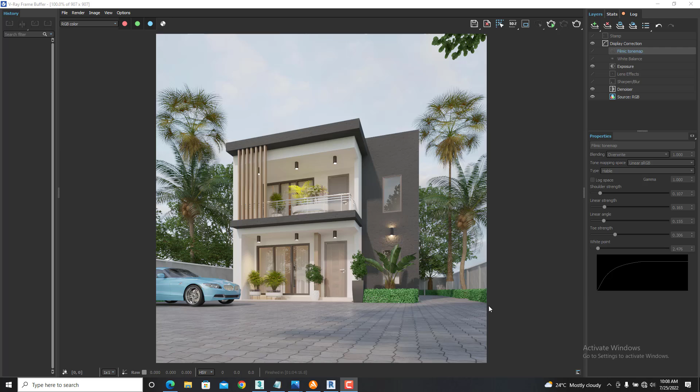After the test render, I can see that I made some mistakes, like this tree is floating, so I've corrected it. I'll bring it down. Let me do that. Press P, so it's inside.

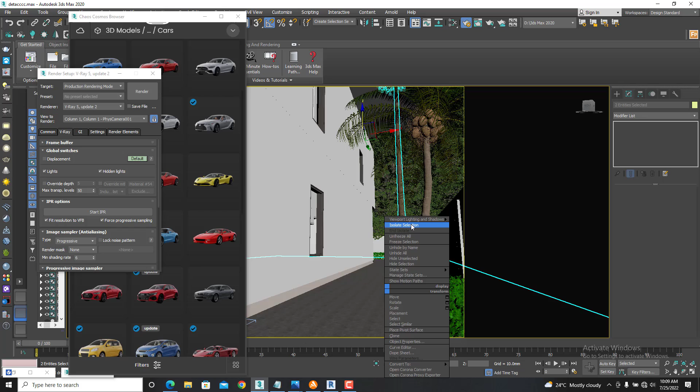Even though all I wanted was just the leaves, as in this part, I wanted this part to show. So I will now end isolate.

So now we want to do the draft render settings. Once we have done the draft render settings, we can now do the final render settings. So we leave this as it is.

We'll come to VRay. Now we are going to use bucket. Then the threshold we use 0.003 to reduce the noise as much as possible. Image filter, let's leave it at this.

Color mapping, you can leave it at this or you can choose exponential. I prefer exponential, but by default what it renders is also okay.

So I think that is all for the VRay. Next one is GI, irradiance map. We'll put it at high or medium, then change the subdivision to like 75. Light cache, change it to 1.18.

Then under this you click on this default. The saturation, I'll put it at 0.23. I'll turn on the ambient occlusion, that's to give it finer edges.

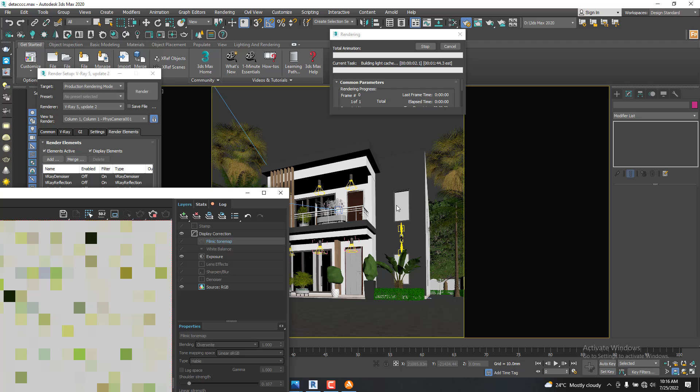So it's going to take some time, but let it load for a while. Then I'll pause it. Then once it has finished rendering, we'll now take it to Photoshop. Yes? Okay, I'm coming.

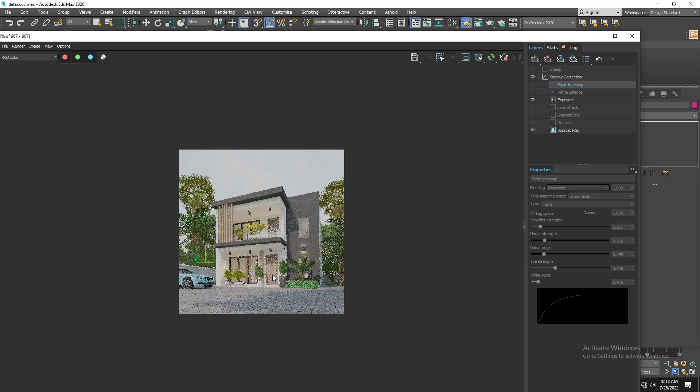So it's rendering, so let me pause it. Once it's complete, we'll continue.

Okay, it has rendered for a while, but I need to explain some more details to you. So this is our render image. Now I told you about render elements, so let me explain it much better for you. Let's go to our render setup.

Now, like I said, render elements—I'm taking this over again so that you will understand it much better. Render elements are just elements that you use to enhance your image. So you have it here.

The ones I usually use are VRay denoiser, VRay reflection, refraction, shadows, and extra tex, specular. Now this specular, I don't need it for now, so let me delete it. All you have to do is add the elements you need.

Okay, you can add as many elements as you need, but these are the 5 that I usually use.

Now they have some settings, like this VRay denoiser. If I scroll down to the preset, I put it at mild so that it does not remove all the details in your work. Mild is okay for that.

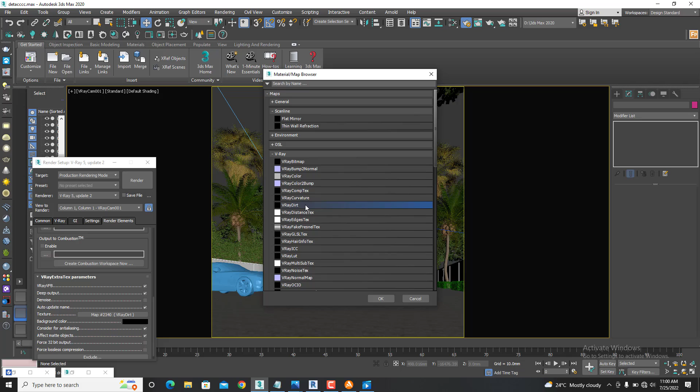Okay, you press M, then drag it into the material editor as an instance, double click on it and put the radius at 300. This is just to make sure that it comes out well. So that is all for extra tex.

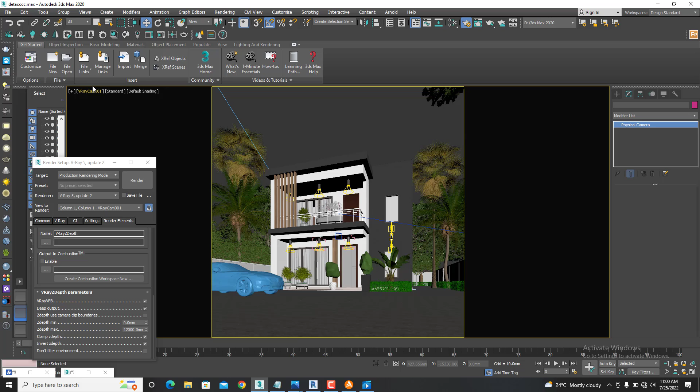Then VRay Z depth is about the camera settings. You click on it and scroll down. You see Z depth minimum and Z depth maximum. Under the maximum, you go to your camera. I'm on the physical camera, so you select your camera.

Now under the modifier tool, you see the target distance. The target distance is about 12 meters, so we'll type in 12 meters for the maximum. So you check what you have here — yours might not be 12 meters. I'll just round it.

Yours might not be 11 meters thereabouts — it might be more, it might be less. So whatever you have here, just round it up. I've rounded it up to 12 meters. So that is about the VRay Z depth.

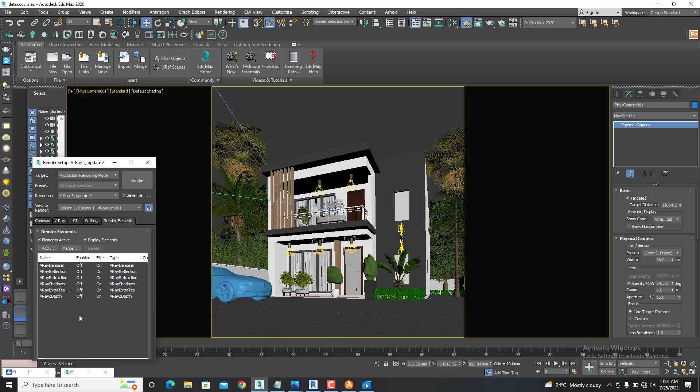Okay, so those are the settings you do for your render elements. Now after you have rendered for some time, it will now bring out all these elements.

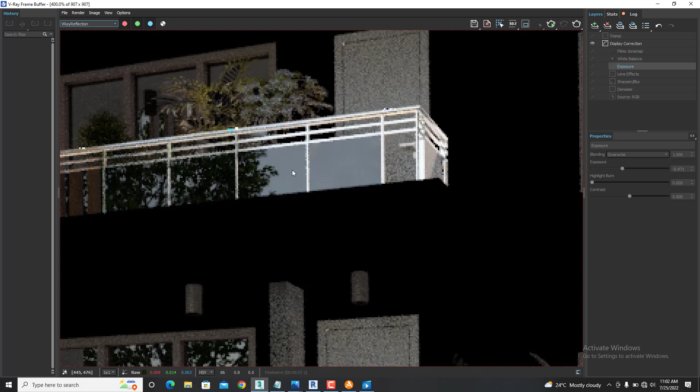So this is VRay denoiser, this is reflection. These are the elements that are reflecting something on it — you can see the tree showing on this glass panel, showing on this window. These are elements that are refractive, you can see.

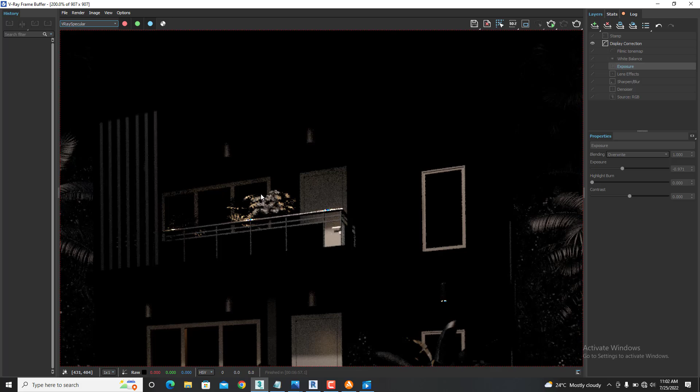VRay shadows, specular — it gives highlights to the area that is glossy or reflective. Extra Tex, usually in white and black. VRay Z depth.

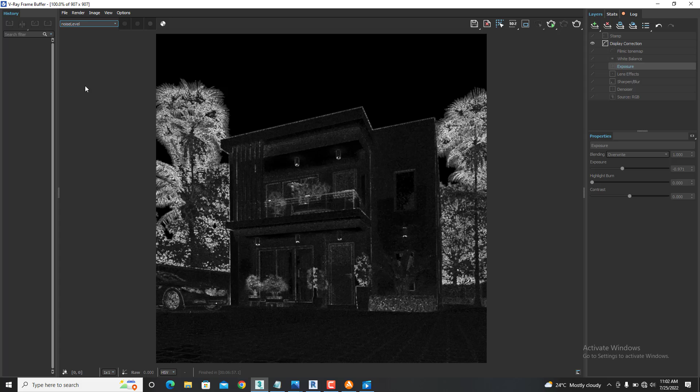Which other one did we add? I think those are all that we added. By the time we finish rendering, we will save them as a separate file so I can use it in Photoshop. So let's render again.

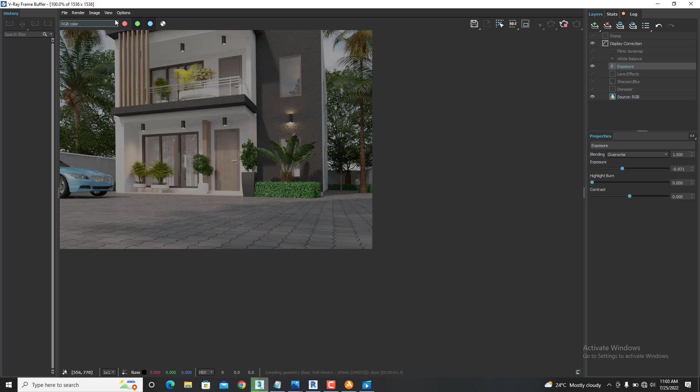So I'm re-rendering again. I stopped the render so that I can explain these render elements for you. It will re-render all the elements again, so we'll wait for it to render for a while.

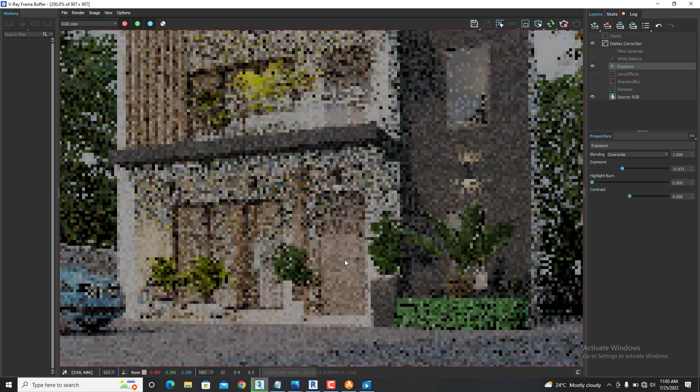At least — okay, anyway, to show the number of hours that it will take, I'll let you know the number of hours used at the end of the day. But within an hour, it depends on your system. Within an hour I should be able to get a good render.

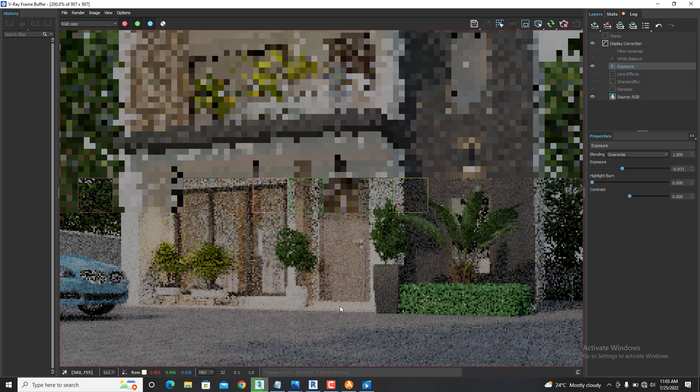So I'll wait for an hour for it to render, and by then we'll resume the class so that we can now do the post-production, which is the last video. I'll be so excited to see your project. You can see it's a very simple process, just for you to practice, and you'll get it.